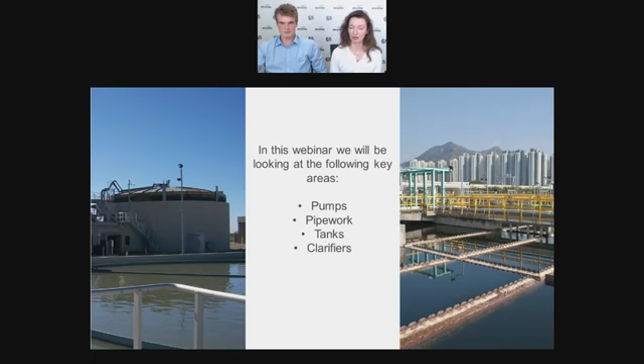Okay, so starting with pumps within the industry, these can suffer from damage from many mechanisms, the primary two being deterioration due to corrosion and similarly for erosion. There is also impact, chemical attack, and many others. So we're going to look at some of these mechanisms in a bit more detail and the Belzona solutions for them.

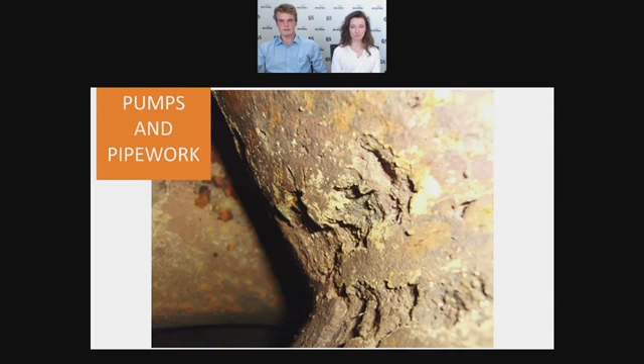So pumps and pipework are under the constant threat of erosion and wear as they handle large quantities of liquid throughout their working day. Entrained solids can damage pump elements, casings can be eroded by constant water flow and corroded by chemicals, sewage, other compounds and materials involved in the treatment process. Long lead times from manufacturers often mean that an out-of-service pump can cause lengthy delays and shutdowns, and outright replacement is often very expensive. When out on site, we need to look at the evidence which suggests the cause of the damage, so that we can identify the root of the problem.

So starting with the photo you can see on the slide, we can see damage from entrainment or solids suspended within the flow. If we compound this with corrosion caused by aggressive substances within the flow or the sewage, then we can see erosion corrosion, where the corroded steel is eroded away, therefore exposing fresh steel, which is then exposed to corrosion, and the process then repeats. So we then start to see severe metal loss and ultimately a loss of efficiency and increased operating costs.

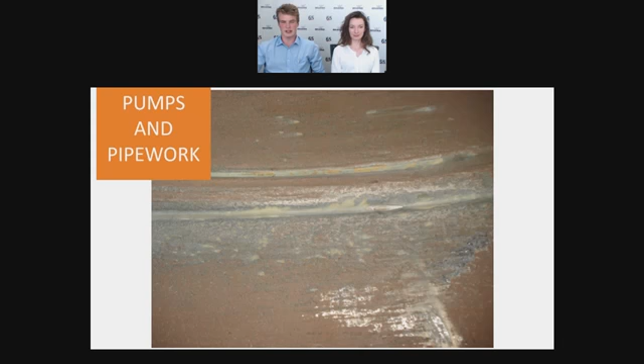To take this sewage pump here, we can see it's very heavily corroded and damaged. Most asset owners would probably discard this pump and replace it with a new one. However, it is possible to restore these pumps to bring the efficiency back up for the long term using epoxy solutions. This can be a much more cost-effective solution. In fact, based on previous experience, the cost of an epoxy solution is around 20% the cost of replacing a pump outright.

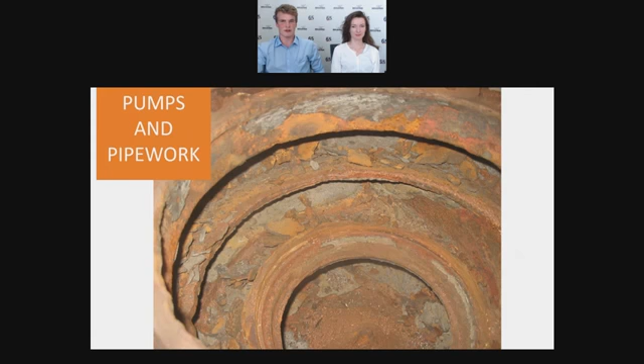So in order to restore this pump, we first begin with grit blasting. This serves two purposes. Firstly, it removes all the loose, friable rust and corrosion metal, and it cleans the surface. Secondly, it provides a profile or a key for the epoxy to adhere to. Next, we use a paste grade epoxy to rebuild the profile of the pump internals and components. And then finally, we apply a protective ceramic coating to provide long-term protection against erosion and corrosion.

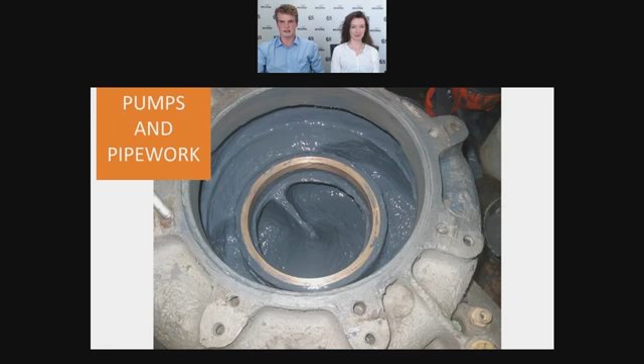Another form of damage we might see is cavitation, the evidence of which you can see on the screen. So the typical signs of cavitation occurring is localized pitting caused by the collapsing of steam bubbles near the surface. This most often occurs in areas of low water pressure, particularly the trailing edges of impellers, where the pressure is low enough to allow the water to boil.

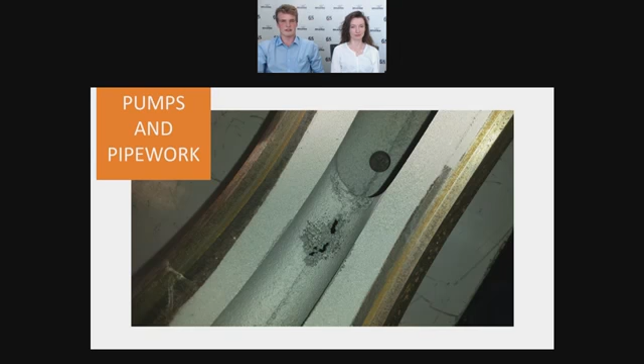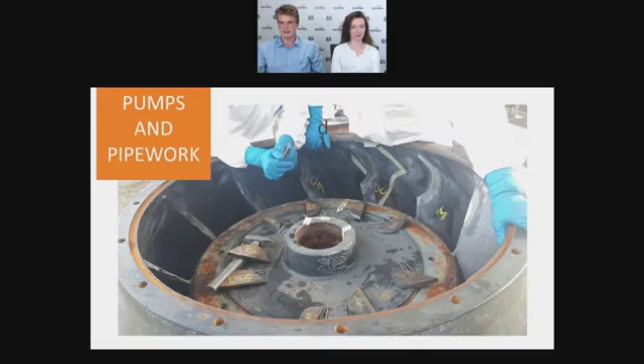So given the impact nature of cavitation, this calls for a solution with high toughness, as a hard ceramic coating will be too brittle and lack the toughness to withstand the energy of the impact. Therefore, Belzona has developed an elastomeric system to protect equipment against cavitation. This polyurethane can withstand the deformation caused by the cavitation microjetting. So Rachel's now going to take you through an example of some work done on a pump in the field.

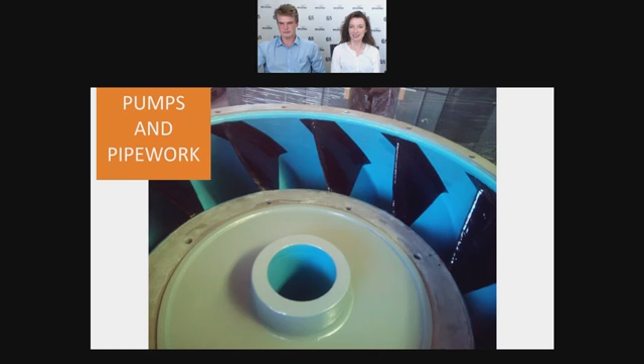So to introduce our first case study, this took place in Montreal, Canada, where this pump had experienced severe erosion corrosion. It had been in operation for several years and was seriously deteriorated. Therefore, the team at the plant thought it was scrap and wanted to replace it. However, when they visited the pump shop, they were told about Belzona solutions and how polymeric materials could be used to restore the pump.

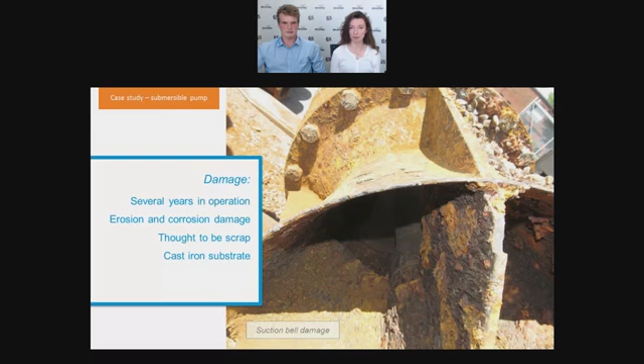After consultation, the chosen materials were Belzona 1111 to rebuild the pump and Belzona 5812DW to coat it. Beyond the properties of these materials, which fully restored the pumps as you can see, there were many reasons why the pump shop recommended Belzona. For one, the Belzona brand. We've been around since 1952 and in that time have built up a reputation for quality. As well as this, the solutions had NSF 61 approval, which was necessary for the plant.

But rather than just tell you about how easy it is to use Belzona linings, here we have a video showing you how to protect pumps with an erosion-corrosion resistant coating.

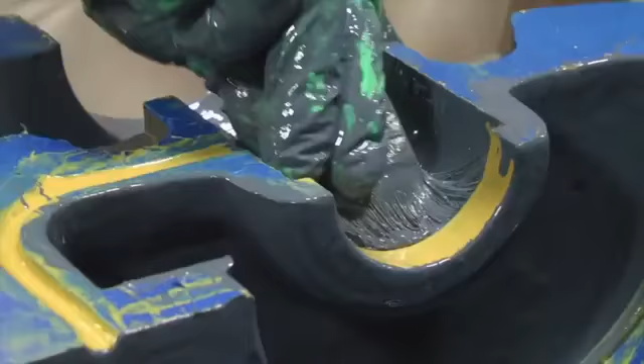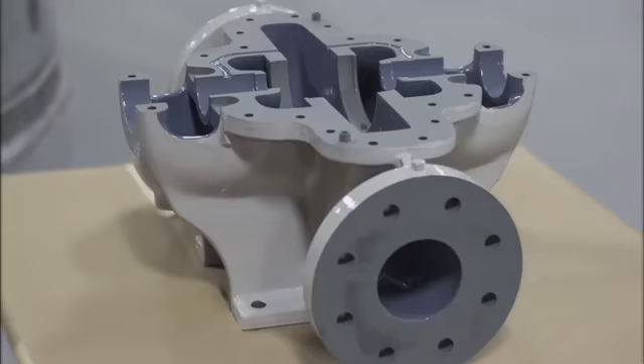Okay, I hope you all saw that video there. So we're now going to move on to pipework solutions.

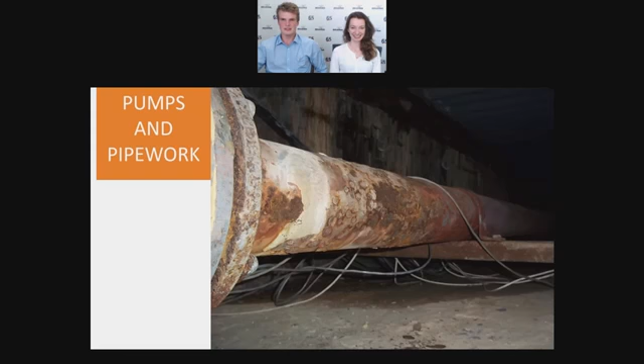Yeah, there we go. So we're now going to move on to the pipework section of the webinar. So pipes suffer from damage both on the external and the internal diameters from both erosion and corrosion. So externally, we may see some environmental attack, which calls for a solution where we form a barrier between the pipe and the environment. Internally, we may see damage from erosion and chemical attack, possibly at high temperatures as well. So these forms of attack both lead to a loss of wall thickness.

This may eventually lead to a live leak situation, which often causes the asset to be taken offline whilst it's repaired or replaced altogether. So the downtime of this can be very costly, therefore an epoxy solution can be suitable to avoiding these costs. So let's take a look at some examples in the field.

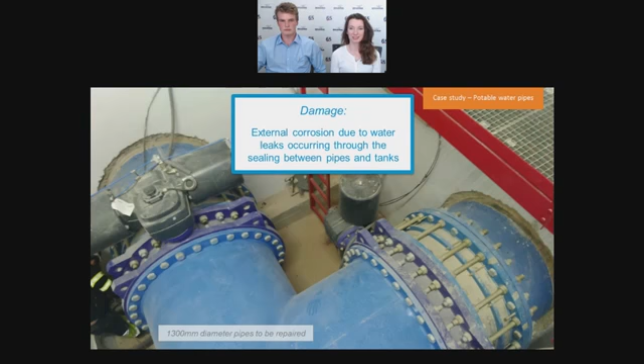This case study was at a pumping station in Tarragona in Spain, where these water pipes were suffering from significant external corrosion, and this was due to leaks occurring through the sealing systems between the pipes and the walls of the tank. To create a long-term repair for these issues, Belzona SuperWrap 2 was chosen to wrap the pipes. Then, on top, Belzona 5811 was applied to provide a smoother finish to the repair. As well as this, the concrete tank was repaired with the mortar repair material Belzona 4131, and to complete the application, the pipes were coated in a blue polyurethane material, as this was the specification of the station.

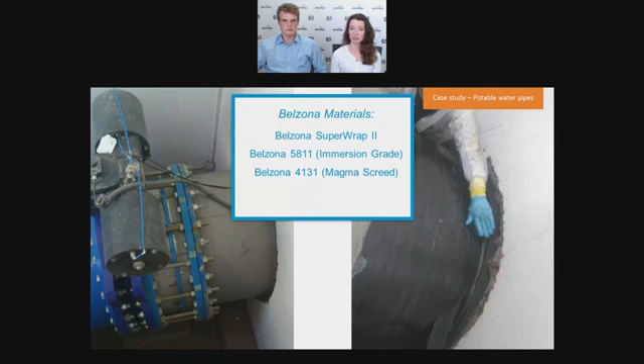And I see we have the project manager of the SuperWrap 2 application, so hopefully it's all performing well, because SuperWrap 2 is an ISO ASME compliant wrap solution, meaning that it has outstanding properties and will actually restore the mechanical strength of the pipes for 20 years or more. This application was able to also take place whilst the pipe was online without any disruption to the water supply, and consequently more than 30 other smaller composite repairs were carried out around the same facility, all using Belzona SuperWrap 2.

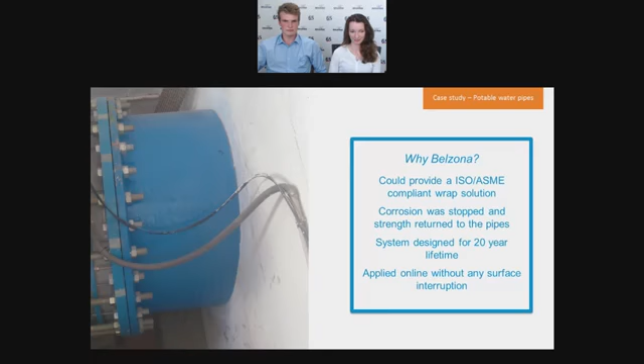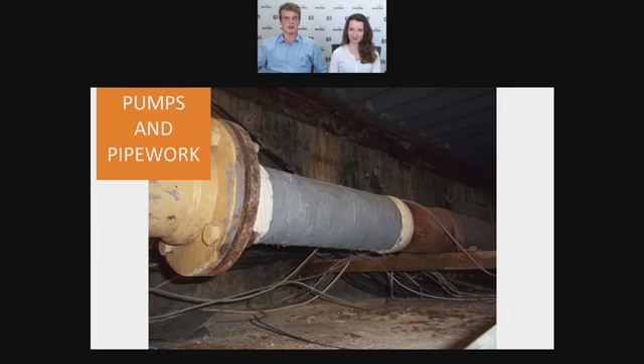So as you can see on the slide, we can use epoxy solutions to reinstate pipe integrity and reinforce the asset using patch repairs or even full circumferential wraps. So in order to protect against this happening in the future, we can carry out an internal coating of the pipe to protect against erosion and corrosion. So depending on the access, this can be done by hand or for smaller diameters by spin spray methods. So Belzona coatings can provide protection against erosion, corrosion and chemical attack, even at elevated temperatures for the long term.

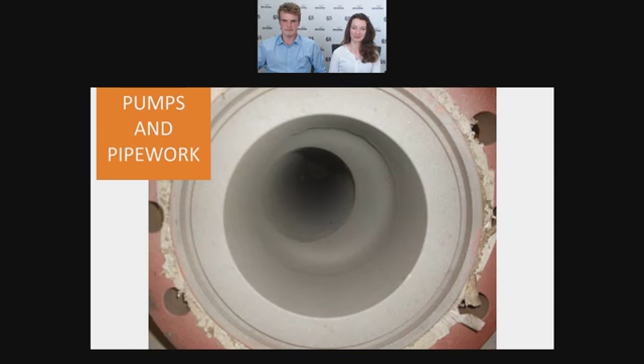Next, we're going to be looking at tanks, including clarifiers, within the industry. We've split this into 3 areas which typically experience damage. So that's tank exteriors, tank interiors, and concrete. And James will now talk you through each of these areas.

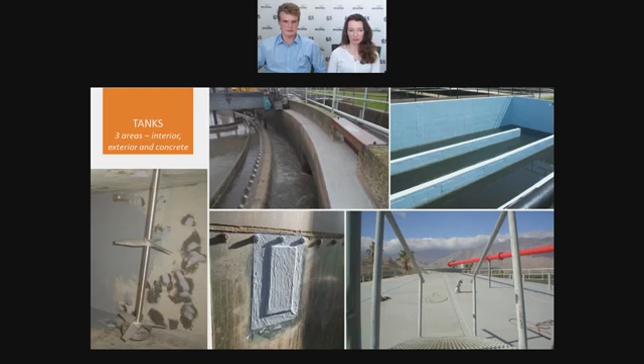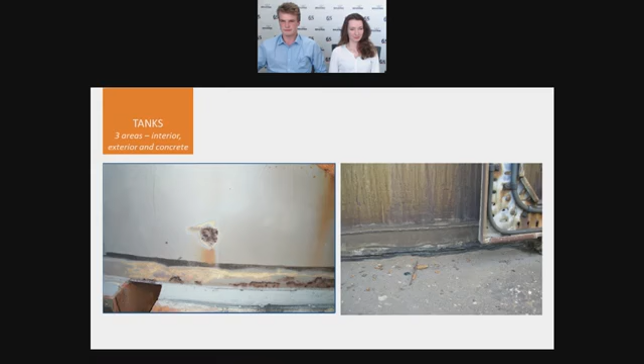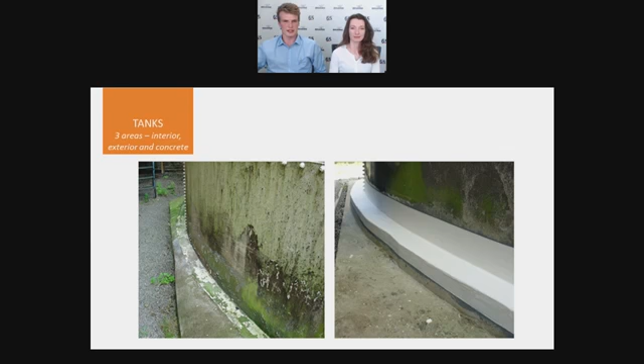So sealant failure, adverse weather conditions, or condensation can lead to corrosion of the tank base, tank failure, and ultimately leakage. So tank roofs are also susceptible to rapid deterioration caused by the corrosive vapor of the stored media. Tank walls can also suffer from corrosion and leaking welds. To combat tank base problems, Belzona formulated a tank base sealing system back in the 1990s, which is liquid applied in conjunction with a reinforcing sheet. As a flexible membrane, the system possesses a unique breathable feature, so liquid cannot permeate the membrane. However, the vapor escapes freely, allowing the underside of the tank to dry out. Roof and wall damage can be safely repaired in situ and online, eliminating the need to drain the tank and therefore reducing downtime.

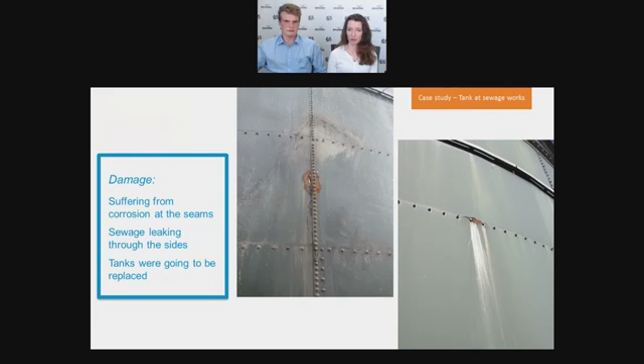This application took place at a water treatment plant in the south of England. The tank was suffering from corrosion issues around the seam areas, and in two places the corrosion had resulted in holes in the tank, meaning raw sewage was leaking out. Whilst deciding what to do with the tank, whether to repair or replace it, the treatment plant asked Belzona to provide a solution to keep the tank usable for the time being. Therefore, temporary patches were installed using a Belzona system. Fast curing materials were necessary, as all work had to be carried out in just one day, as the tank had to be put back into service at the end of the shift.

Therefore, a surface-tolerant material was used to patch over the holes, before Belzona 1161 was used to bond the patches. After the application, the customer was very happy with the repairs, and instead of building a new tank, decided to line the inside of this current one with a Belzona system.

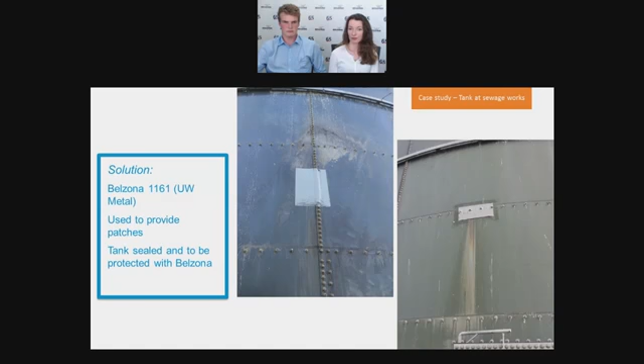So steel vessels, ranging from drum thickeners to digester tanks, are all subjected to a range of harsh conditions by the water and wastewater industry. MIC, or microbially induced corrosion, can occur to the substrate, whilst the chlorides and sulfates present in wastewater sludge can similarly corrode steel vessel interiors. These are just examples of the many forms of attack.

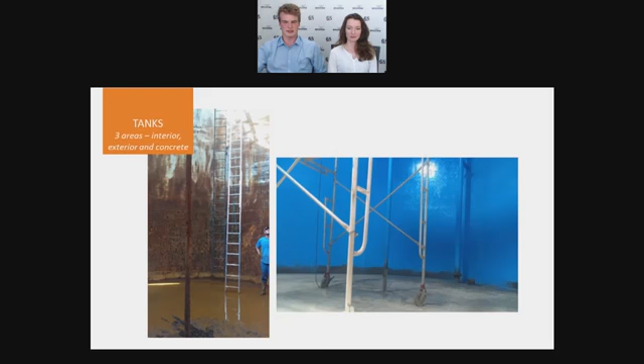Concrete tank interiors can be eroded by submersion in water or corroded by chloride chemical attack, leading to cracks and leaks, resulting in compromised water quality and plant efficiency. Belzona coatings are designed to protect tank and vessel interiors by providing a chemical-resistant internal lining. Belzona 4311 is designed to protect secondary containment areas and also vessels and tanks against chemical attack, whilst Belzona 5811 can protect surfaces subjected to constant or regular immersion in aggressive liquid environments.

For the water and wastewater industry, Belzona 5811 DW2 and Belzona 5812 DW are approved for contact with potable water. Belzona solutions and coatings are easy to apply and cure at ambient temperatures, allowing for a rapid application and a minimum of downtime. Providing a long-lasting, effective solution, they're an excellent alternative to lengthy replacements or repair works. Another benefit of using a coating system is that it allows you to use a coated mild steel tank as opposed to the relatively high outlay for an all stainless steel construction, thereby keeping your costs down.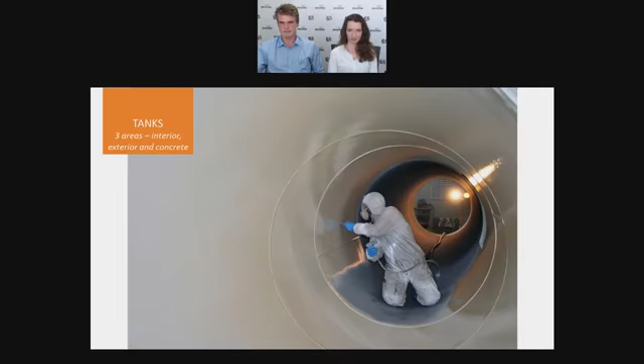And now we're going to show you another video on how to protect a potable water storage tank using our materials. Again, the volume might be quite high, so remember to turn it down now and up again afterwards.

Okay, so the wastewater treatment process and related activities expose concrete to a variety of damage mechanisms, including erosion, corrosion, physical damage, chemical and microbiological attack, carbonation, and freeze-thaw cycles. High relative humidity, the need for cold temperature curing, and the requirement to keep operations running smoothly make repairs increasingly difficult. Belzona concrete repair composites are designed to rebuild and repair damaged concrete surfaces, restoring the original profile with a simple procedure that minimizes downtime and can be completed without hot work.

Belzona concrete repair systems will cure in a matter of hours, achieving full mechanical hardness soon after, as opposed to concrete, which usually takes around 28 days to cure. Specialist coating solutions can then be applied to improve resistance to the common forms of wear and corrosion, extending service life with a minimum of financial outlay.

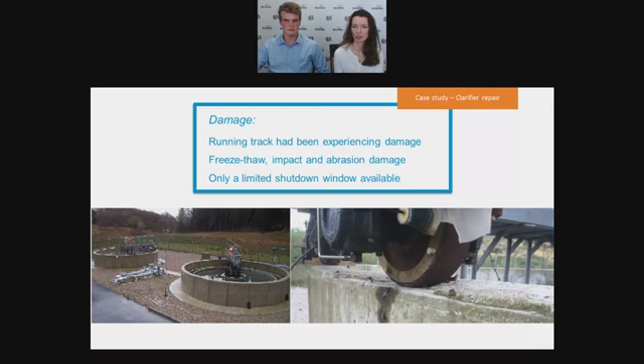At this water treatment plant in Scotland, 2 clarifiers were in need of repairs. The running track on top of the wall had been experiencing impact and abrasion damage due to the arm, and the substrate was seriously damaged. However, there was only a limited shutdown window to make any repairs. The chosen material was Belzona 4131. This had 2 major benefits over a traditional concrete repair.

Firstly, by using a Belzona material, a repair could be completed in a fraction of the time it would have taken to knock down the walls and rebuild them. As well as this, the material's chemical and impact resistance prevents the original problem from recurring. The reason why it prevents the problem from reoccurring is that the Belzona concrete epoxies are non-porous. Therefore, you eliminate water ingress, and therefore freeze-thaw cycles cannot damage the material.

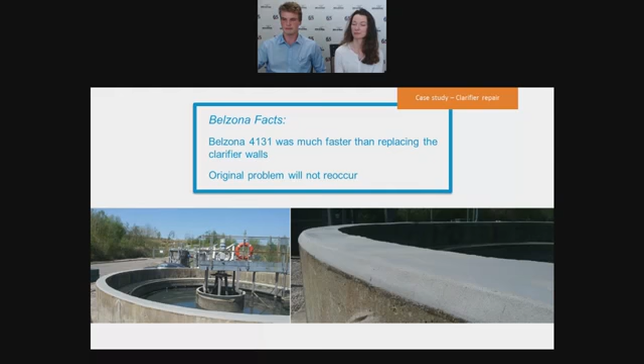So as a conclusion to this webinar, just to run through some points about the Belzona materials, asking ourselves why Belzona. The materials are all cold applied, there's no hot work involved. They're solvent free, 100% solid, so there is no shrinkage. Hand applied with very simple tools. Fast curing for a very minimal downtime on the equipment.

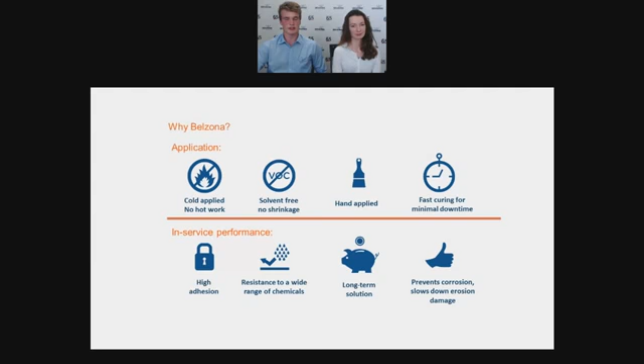High adhesion and resistant to a range of chemicals. We've tested the chemical resistance against many different compounds and materials, and all mechanical testing has been carried out on the adhesion. These are a long-term solution, definitely not a quick fix. And most importantly, they will protect your equipment and assets from corrosion and slow down erosion damage.